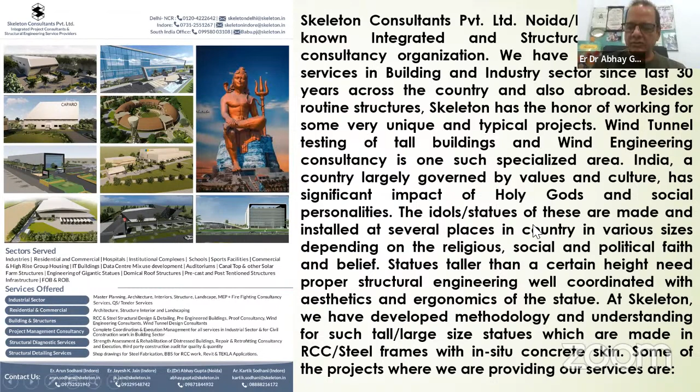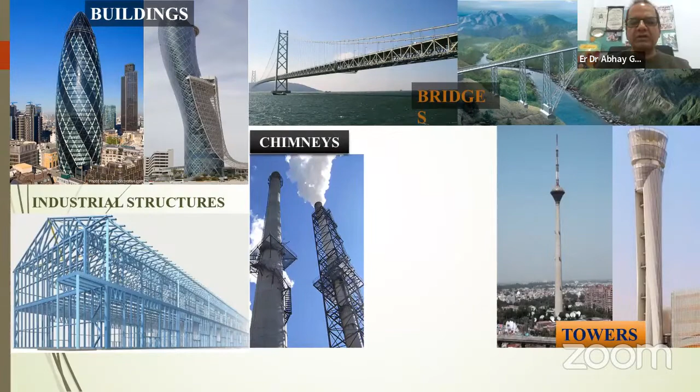So rather than that, we all have learned the design of buildings, some of the very well-known worldwide buildings I have shown. We have also learned the design of bridges, some of the marvelous bridges in the country and around the globe. Huge industrial structures, a complete space frame matrix of the steel trusses, air traffic control towers, which are very special structures. Chimneys are there, but a structure like this, a statue, which has got a height similar to building or tower, which has got a huge shape, huge size like industrial structure or chimneys, the size, and the bridges, dams. But the complication lies in the fact that when you start studying the cross sections from ground to the top, every cross section at every inch starts changing.

The prismatic shape word is far beyond from these shapes, and you have the complexity of the shape, which is a human posture or some other statue. So this is the challenge of designing a statue which encompasses the peculiarities of many of these.

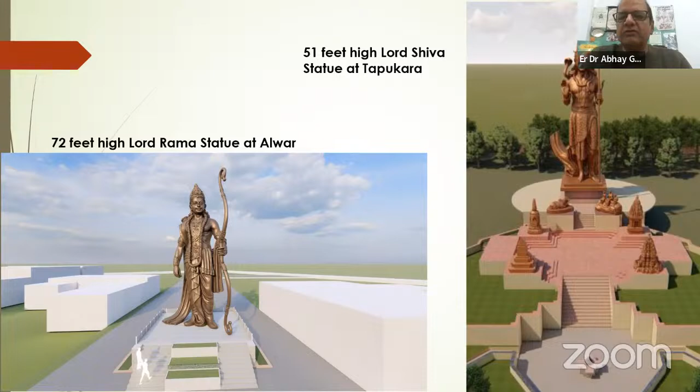Different materials are also there. Worked for a statue of Lord Rama and Shiva. Then Hanumanji at Koradi in Maharashtra near Nagpur, 151 feet, and then Lord Rama statue in Guna. These are under progress. Under the right side, Hanuman and Ramchandraji is under construction.

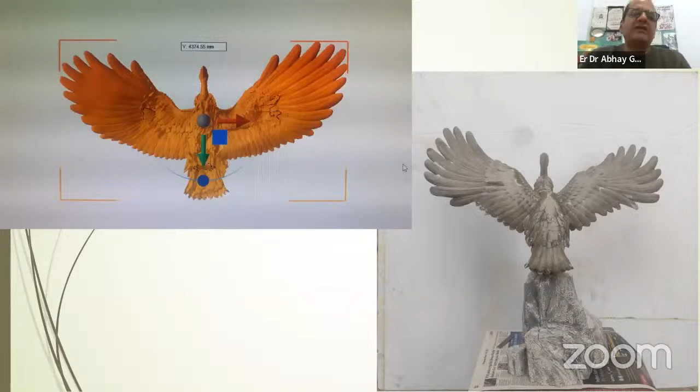This is a very typical statue work which we have just been assigned in Ayodhya. You know, Ayodhya has been revamped. Ayodhya has been restored to its original glory, and all the characters from Ramayana and that period are being placed, installed. So this is Jatayu statue, and it is not very big, but it is complex and vulnerable in terms of those broad wings which are on either side.

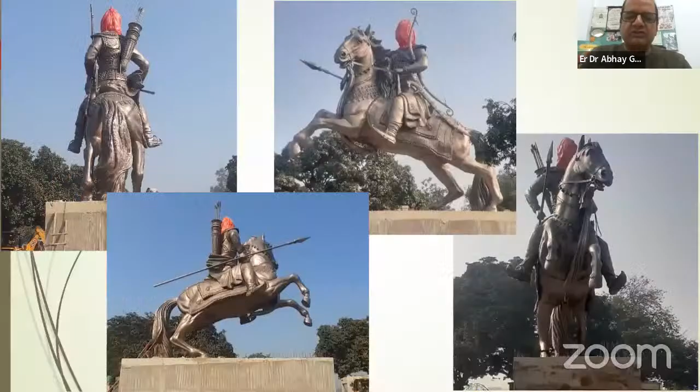On the right side is the horseman statue of Raja Suhel Dev in Bahraich, UP. This statue is very challenging as the entire weight of the horseman sitting at the top and the horse body is only resisted by elements passing through two rear legs and the tail. So the entire weight is balanced like this completely. This has been constructed, and these are the actual constructed pictures. The face is covered because it is yet to be inaugurated.

We also do statues in India. We are making statues of national pride. On the left side is the statue of Lachit Borphukan. He was a warrior in northeast Assam who did a lot of good for the country's original natives, fought against the enemies. So an 85 feet high statue is coming up in Jorhat. We are working on this.

On the right side, you see, not me in the picture, that's once I pose and click, Netaji Subhash statue at India Gate, New Delhi. We didn't do the manufacturing, the fabrication or anything else, design of this statue, but this is a solid stone statue in granite, and it is 28 feet high, 72 metric ton weight. We did the design checking from the perspective of earthquake when this was to be installed, and we did the complete erection engineering right from shifting this statue from its crafting place, which was in National Gallery of Modern Art, Delhi, from there to bringing it here and then establishing inside this existing canopy. It was a challenging task, and we did the design of the entire steel structure, and then it was placed here.

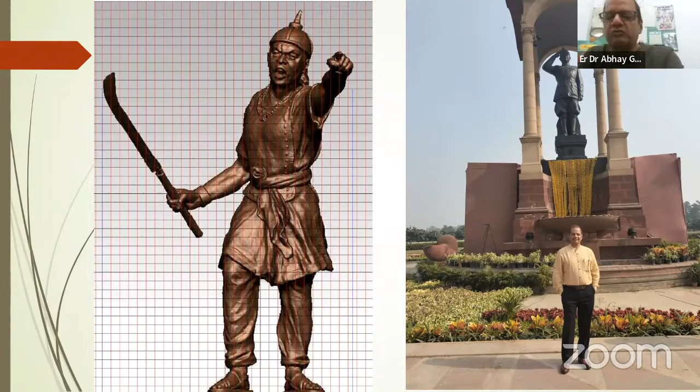Worldwide, statues are made for various reasons and of various materials. Primarily, the internal frame is one material and external skin is another in case of hollow statues. In case of solid stone statues, that is all stone. So this one statue is say 29 meters with a pedestal of 11.5, so total 40 meter granite stone solid.

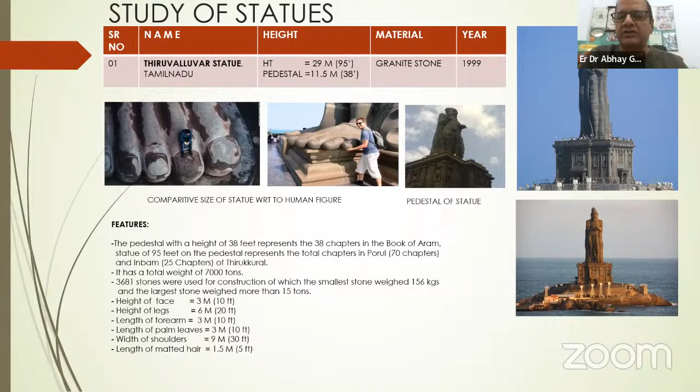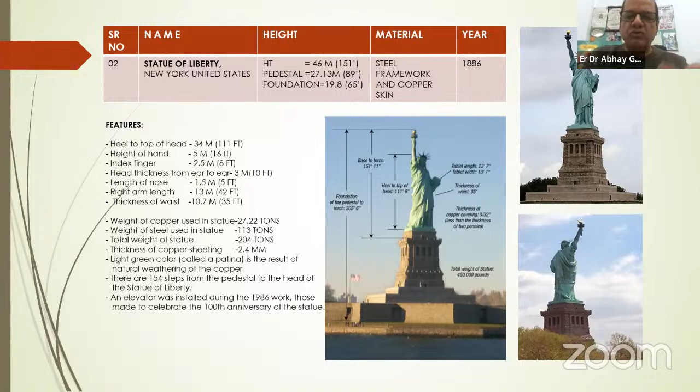Statue of Liberty, we all have seen this. This is similar to what we did in Nathdwara and what has been done in Sardar Patel statue. It's hollow inside, steel frame, and over that a skin has been put. In case of Sardar Patel statue, steel frame is there and the statue skin is casted cladding of bronze, which was done outside India and then brought here and fixed over the frame.

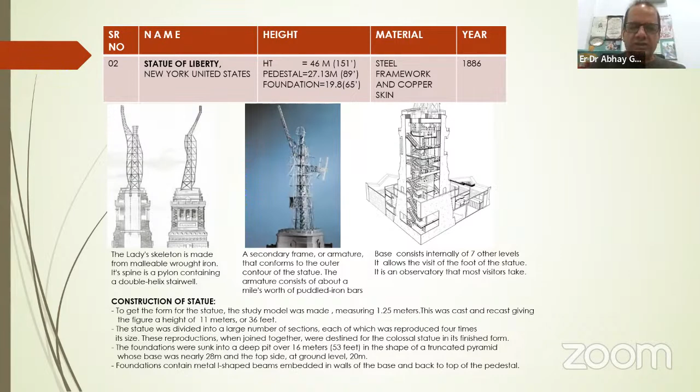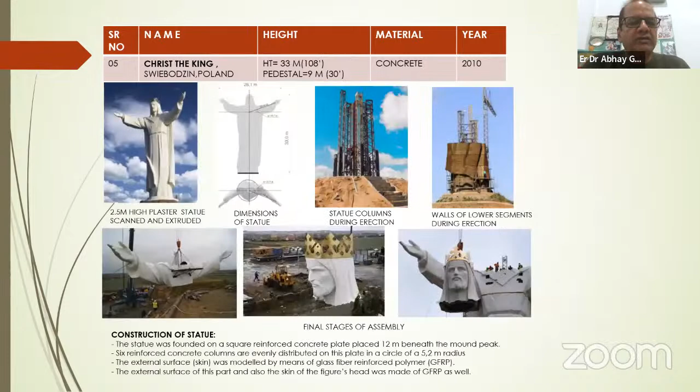Whereas in case of Lord Shiva statue and even in case of Solan Hanumanji statue, the skin is a cast in situ concrete skin, which is a big challenge. I'll share details of that. Jesus Christ statue is steel and concrete. Cristo de la Concordia, this is again Christ, but this is steel and concrete, and this other one is concrete only. This is another statue which is steel frame and concrete. You can see worldwide height-wise different statues are constructed, and here it is 182 meters Sardar Patel statue.

This is a monument in itself, lasting for a longer time period. This is steel framing. Concrete is on some core wall and then casted metal skin, bronze skin on that.

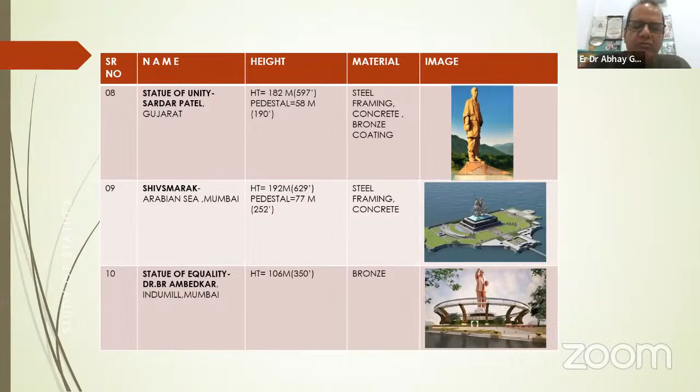Then second one is Shivaji statue, which is yet to be done, in Mumbai. Quite tall, they have proposed 192 meter. And statue of equality, Dr. B.R. Ambedkar in Mumbai again, that is again on the proposal stage concept. We are not doing it, I'm just showing you different kinds of statues. Lord Murugan statue in Malaysia is very famous. Then Ukraine, and then Gandhiji statue in Bihar, Patna.

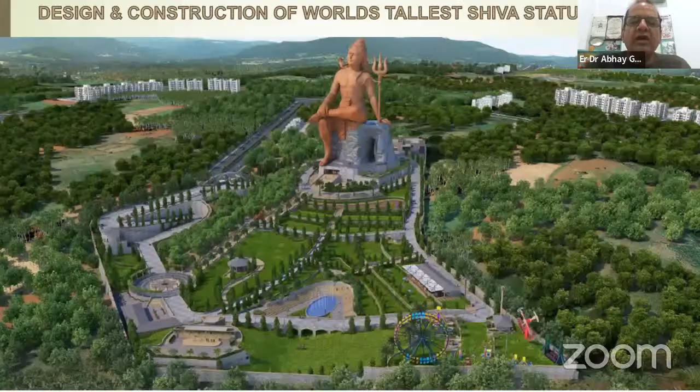There are some more statues of Lord Shiva in sitting posture coming up at various places, 125 feet. This is the statue which we are going to see in detail, a bird's eye view of the entire project before the construction was done. And this is after construction, a picture taken from a long distance. This is visible from almost 20 kilometers, people say.

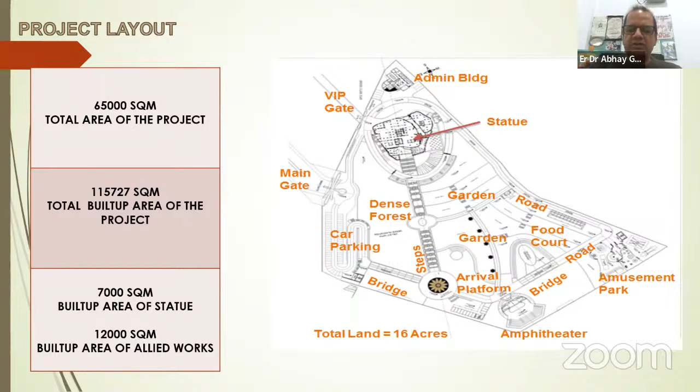The site is a 16-acre land where besides the statue, many developments have taken place. The statue has been recently inaugurated on 29th of October by Shri Morari Bapuji, and it's a complete entertainment theme park. So whenever any of you comes to Udaipur, you must visit this place. This is all set for visitors.

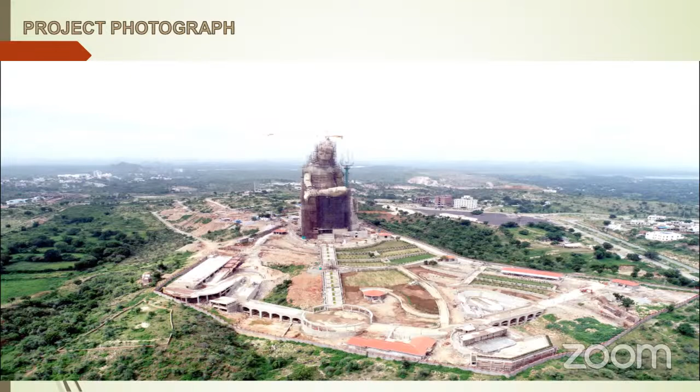You can enter, go inside, and go up to the top, up to 280 feet. There is a gallery where you can come out, and then you can even go up and do Abhishek at the top. So that is all the fantasies and attractions created besides other things.

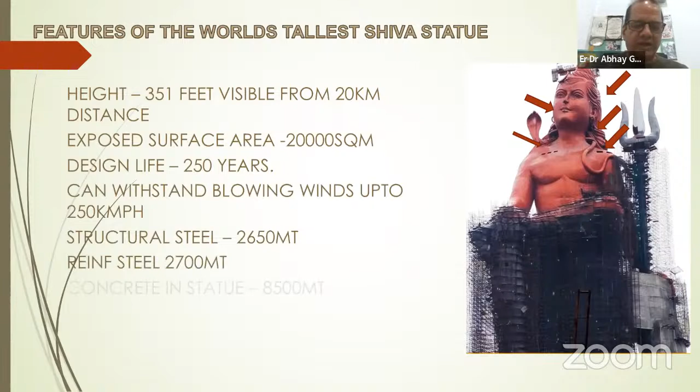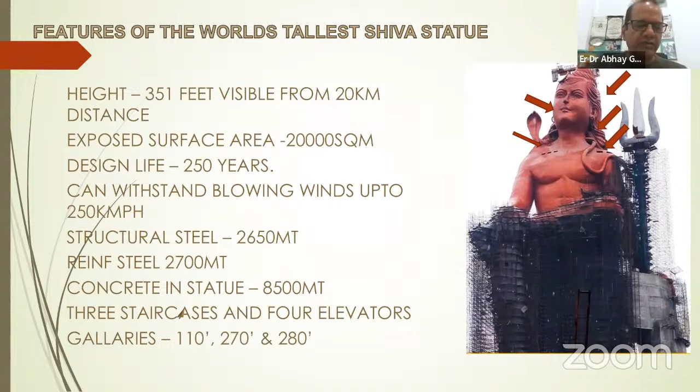Some of the features of this statue: the skin which you see is 20,000 square meter, which is almost 2 lakh square feet. The statue has been designed for 250 years of life. It can sustain winds up to 250 km per hour. Total steel consumed is 2650 metric ton, reinforcement 2700, and concrete in the statue is 8500 metric ton. There are galleries at different levels, I'll share the details.

This is the team which has worked. The main person, the brain behind this statue and the sponsor, is Mr. Madan Paliwal from Miraj Group, Nathdwara. The Murtikar sculptor who did this posture and the complete shape, the Murtikala, is Naresh Kumawat. We did the structural design where Professor Prem Krishna, many of you must be aware of his name, former professor and head of IIT Roorkee Civil Department, did the proof checking. Shapoorji Pallonji did the construction. Excellent work done by Shapoorji, and I have full appreciation for them for this wonderful work.

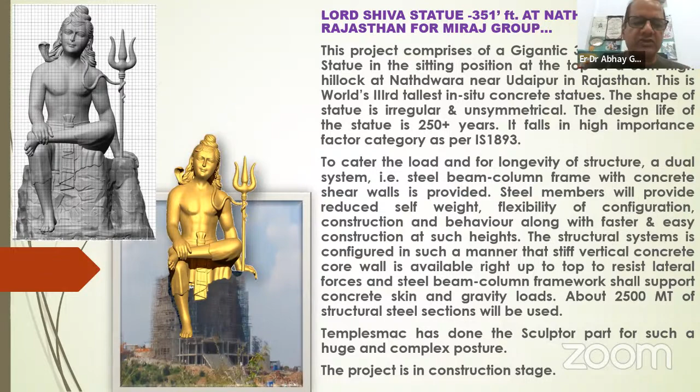How is this done? The project comprises of one 351 feet statue with a 170 feet trident. You can see the Trishul by the side, which is 170 feet freestanding.

It is varying, unsymmetrical, and in all three directions, more than three directions even. So we employed a software called Tekla, which has enormous and very good 3D capabilities in building information modeling. Wonderful job was done by the team. We extracted shop drawings from Tekla, and the fabrication work done by Shapoorji at site was amazing. There was absolutely no flaw anywhere, and all parts were assembled one by one at site. This is how the shape has taken place.

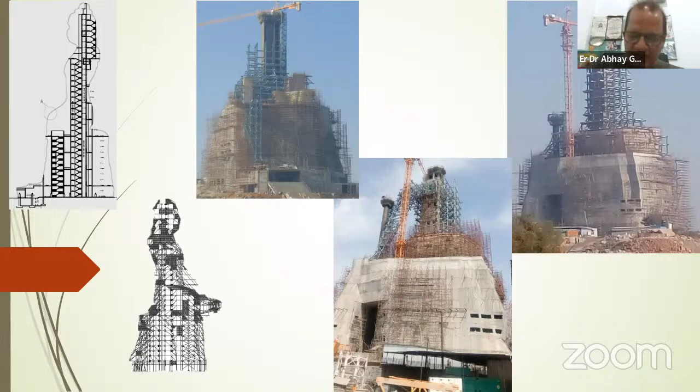When it comes to a statue like Hanumanji, which is standing, there's simplicity, but there's complexity in a sitting posture statue.

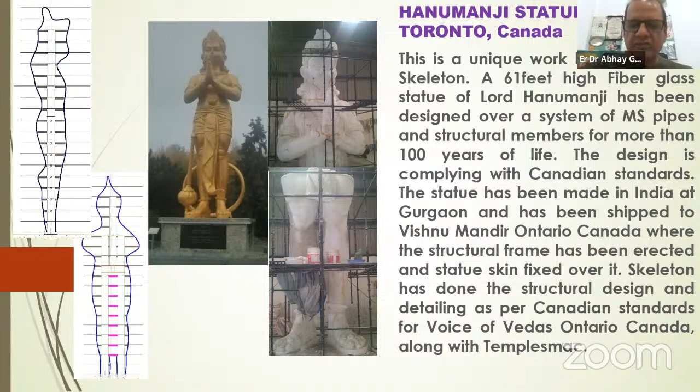But when it's a statue like the sitting posture of the Shiva statue, the variabilities are too many. The structural columns, main structural members, you cannot continue all columns - you have to see which are going to be terminated, which re-erected as stub columns or bracketed frames. I'll show you those things. That is the difference between different types of statues, and our challenge lies in the structural planning.

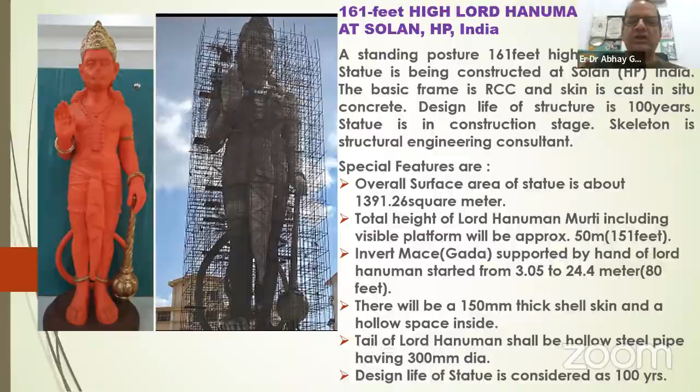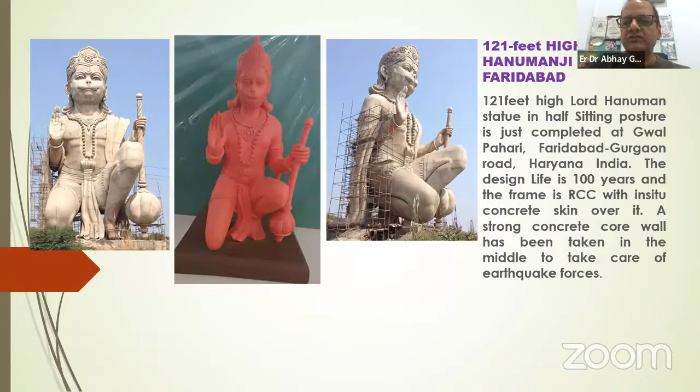This particular statue, as I was saying, is in the Limca Book of Records. That is the actual photograph of this site - this is Faridabad. In all of these, the complexity lies in identifying the plan layout at various levels.

So for this, the sculptor or Murtikar, once the posture is approved by the client or sponsor, uses new technologies - 3D scanning and digitization - to get cross sections at any desired level. We ask them to provide cross sections at closer spacing. In case of Lord Shiva, we got cross sections at every 5 feet of height.

But in case of the Jatayu bird, we got cross sections at every 0.25 meter, because it's a smaller statue with more complexities and variabilities.

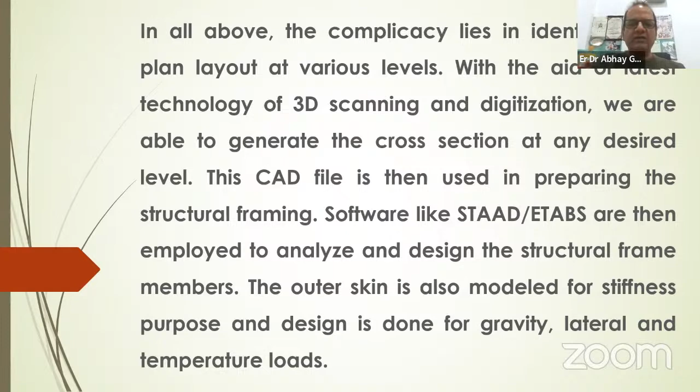Once we decide the material of the internal frame and the external skin - like steel frame and concrete skin - we could have had steel frame and glass fiber skin, steel frame and metal skin, concrete frame and concrete skin, or concrete frame and glass fiber skin. All these are possible.

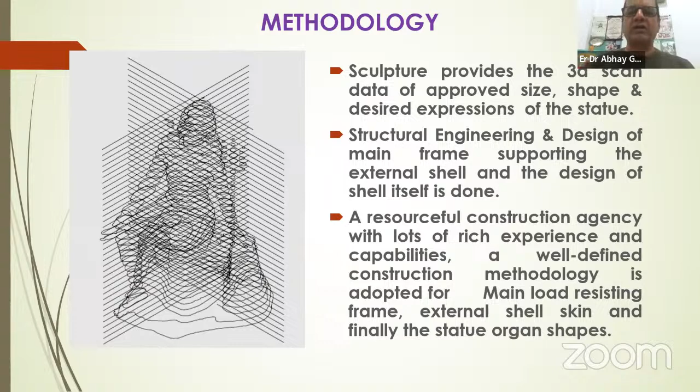So then we do the scanning of a sufficiently enlarged mock-up model. We cannot have a 1:1 scale - I'll show you that. So we start with a small 8 inch model. Maybe the client got this from somewhere, liked this posture of Lord Shiva, and gave it to the Murtikar saying 'I want this.' Then the Murtikar developed this.

Then both of them review it, and it goes from 8 inches to 7 feet - the 8 inch model is 3D scanned in the CNC machine, and then a thermocol mold is made, cut with the CNC machine from the enlargement. Then this posture is again reviewed to see if any changes need to be made.

Once done, then a 14 feet version is made. Generally we go up to 1:24 scale. So when I'm saying 351 feet high, a 14 feet model will be sufficiently good to correlate from this size to 351.

So after 3D scanning and digitization, in order to properly enlarge the small idol to a gigantic statue, at every stage there's 3D scanning, enlargement to the next level size, mold making, dummy casting using plaster of Paris or metal, or ABS using 3D printing. Nowadays 3D printing is available, so that digitized data is fed into the 3D printing machine, reviewing the next level size, making corrections as per looks, aesthetics, and expressions by the sculptor.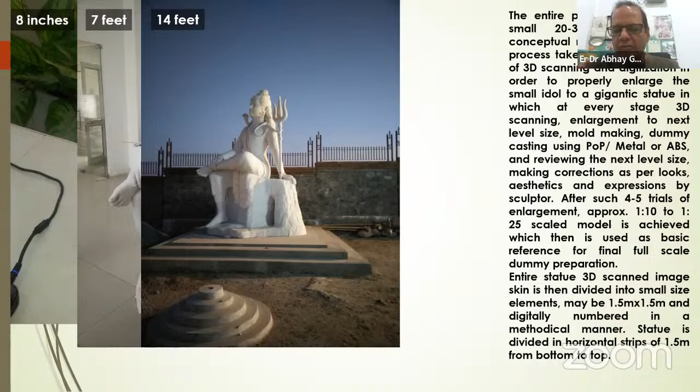So proportionate enlargement of those components which are going to be away has to be little more. So the scale of enlargement has to be different in the lower part of the statue and in the upper part of the statue. That is where the skill of Murtikar is needed. So our sculptor did a good job by properly proportionating this thing.

So this was the final, and this is the scan data of that, which was then fed into a machine and given to us before that for structural designing. So these are the structural sections at different levels. I am just presenting to you 3, but there are 70 such sections. If you look at the leftmost, this is almost the lower part, quite a lower level, where you can see this must be 110 feet.

So here you can see 1, 2, 3 RCC shear walls, which are used for the lateral strength, lateral stiffness of the entire statue. And then when we superimpose this over a 160 feet level, then we see that some of the elements cannot be continued because they are beyond the skin. So there we have to terminate them and see how those elements can be supported.

Then further when we go up, the other one on the right hand side is 280 feet. Here you can see the lift shaft, which was here on the back side in the 110 and 160 feet. It is just coming in the middle. If you look at the body posture, it is backbone. Basically, this is backbone. So the backbone comes up to the neck level and neck to the head level. So that automatically will come in the center as you move ahead from the waist level.

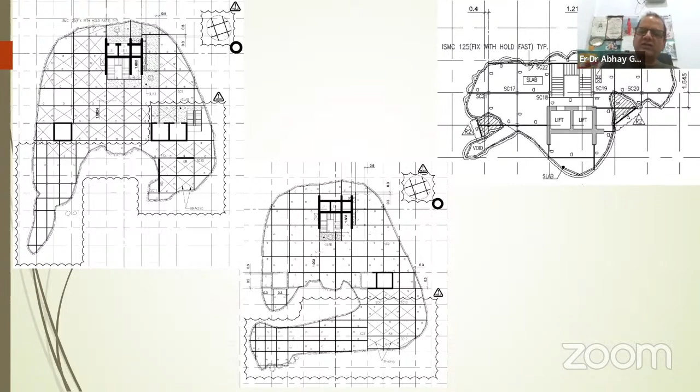So here that is the challenge, that which element will go up and where I have to start new elements, because the hand is projecting, some part of the body are projecting, which cannot be connected from the bottom. So this is the exercise which needs a lot of skill and structural engineering understanding. In case of Lord Hanumanji, this is simpler because the 2 main columns are going right up to the top, from where we are just taking out the cantilever framing up to the skin at every level. That is comparatively easier as compared to this.

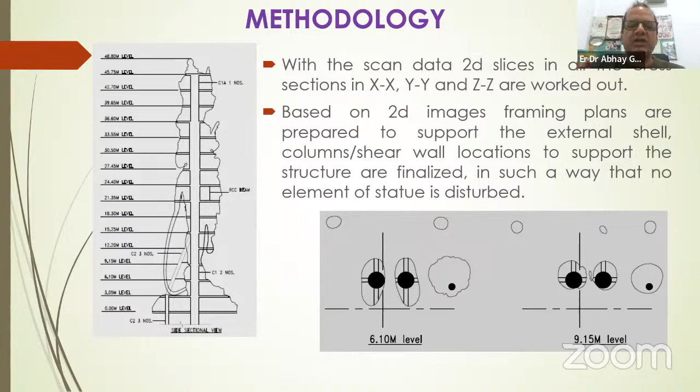Once done, we try to understand the challenges. It is a non-symmetric structure. There are irregularities. Structural steel frame is there and shear walls considered. So the entire steel frame is connected to the shear wall. So it's a hybrid system. And it has been checked safe for wind speed up to 250.

Now, what wind speed is to be considered? See, the IS code does not provide any kind of design wind speed for such structures. It is for usual buildings. They say for any such type of thing, you should go to the wind tunnel. And we did that. We prepared a model on 1:200 scale and then took it to Australia, Sydney, Windtech. Windtech is a wonderful facility there. There we got the wind tunnel testing done.

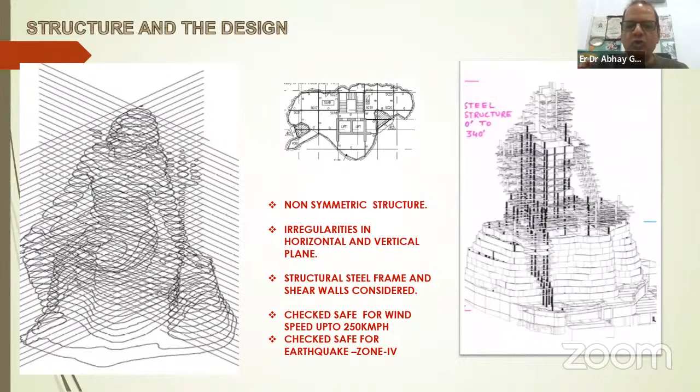And before that, we collected the data from 3 meteorological stations around Nathdwara, 3 airports, and then collated them to get how much is the local wind speed in that area. Similarly, for earthquake, though Nathdwara falls in earthquake zone 2 as per the IS code, but for a structure which is going to be designed for 250 years, we never know what is going to be the change in the geology of the area.

Though we did several studies, the geological study was done, the geotechnical exploration was done, and wind tunnel testing has been done. So rather than taking any chance, since there are 3 lineaments around Nathdwara, which are not active, but maybe in future some activity happens, we have considered a peak ground acceleration of 0.36, PGA 0.36, and with an importance factor of 2, that becomes 0.72 PGA.

So that high value of the, and then further response reduction factor, etc. Though we didn't use the response reduction factor more than 3 here. So some of the special features.

One special feature of the entire skin, which I said is 20,000 square meters, is there is no joint in the entire skin. Complete casting on site. I'll share how the casting was done. But that entire casting is a continuous casting with green cutting. Many of you must be aware of this term green cutting. We didn't leave any joint in the skin, using green cutting.

And another important thing, using minimum 45 days of water curing, we could achieve a complete 2 lakh square feet of the skin that after 4 years of construction today is flawless. Nathdwara has a temperature variation of 50 degrees Celsius in the day to almost 0 at night. Since the concrete thickness of the skin is 200 to 400 millimeter, the temperature differential from outside to inside was almost 20 degrees.

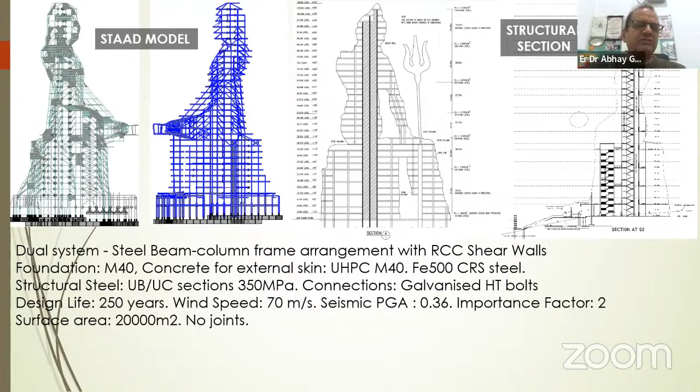If the temperature outside was say 40-45, inside the statue the temperature is much less. So that thermal gradient study has also been done on the skin. All those things we have done. This is the other statue, I am comparing side by side. You can see it is very straightforward as compared to this one, the software and models. You can see the complex structural framing, whereas here it is quite simple. This is Hanumanji.

This is the wind tunnel testing. We have considered various loads in the design, self-weight of the entire structure, skin and all that. Self-weight of skin is quite significant. So the entire analysis has been done in 2 conditions, with skin and without skin. When the skin is there, wind pressure will be there because it is obstructed. When the skin is there, mass will be there, so earthquake force will be there.

But when the skin is not there, there will be less wind, less earthquake, but there will be much less stiffness of the entire frame. Correct? And we did the analysis with and without skin, and we observed that adding the skin in the model increased the rigidity by 8 times. So that was a very significant change, which was required also with the skin on.

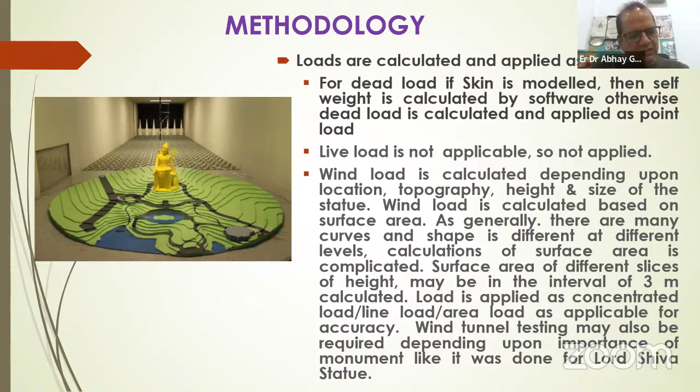The photograph on the left side is the Sydney wind tunnel, where we placed the model on the terrain also. The actual geography, actual contouring of the entire area was picked up by the wind tunnel agency themselves, and they did this modeling and testing.

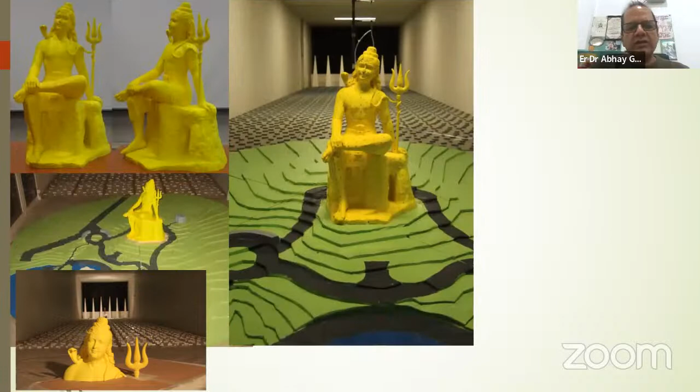So you can imagine 726 tubes, 1000 samples per second, data collected from each tubing for not less than 32 seconds. So 32,000 numbers of data into 726, that was one set of readings. And similar from all 360-degree directions at every 10 degrees, means 36 sets we did.

And then we did another study, that in say the next 250 years, there will be some development coming up around. So we also did one study from the most critical direction by placing some hypothetical building blocks, if some buildings come up in that direction, what will happen? All that was very meticulously done by Wintech, and we went there, stayed there for 3 days, studied, discussed with them, and got very good results. Very wonderful professionals.

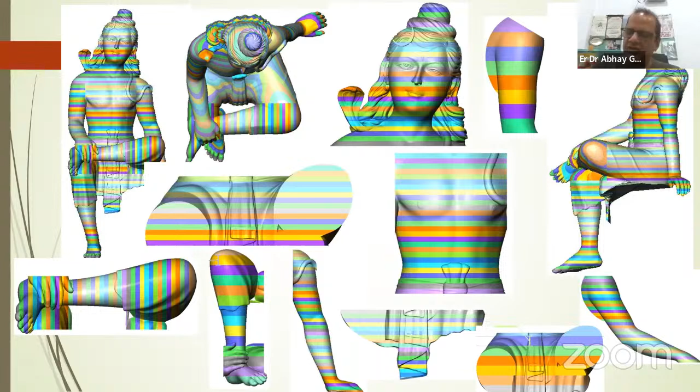This is how the casting was prepared. So the entire statue was identified in slices. These colors are each of 5 feet height. So the 5 feet slices were identified, and then each slice was fed into the CNC machine, where high density thermocol of this shape was cut using a 6 degree of freedom robotic arm CNC machine. And those were then assembled in the field.

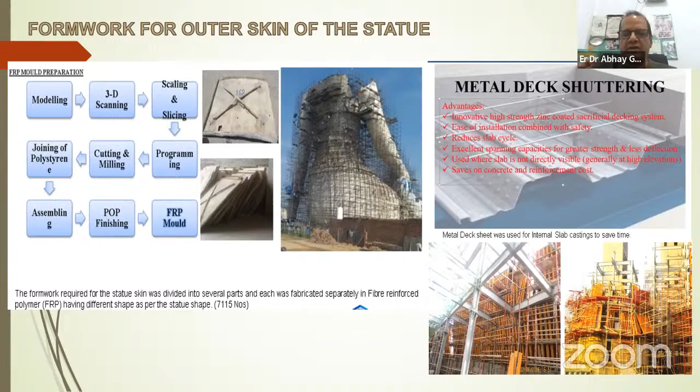I'll show you like this. The middle one is a dummy, a full scale dummy made using those thermocol cut pieces to extract the glass fiber molds. So on the entire skin, the glass fiber was laid, and roughly 5 feet high pieces of glass fiber, properly stiffened from the back, were manufactured, stacked, and then shifted to Nathdwara for external skin shape casting. So this is the full scale dummy. You can see these are some of the construction stage pictures.

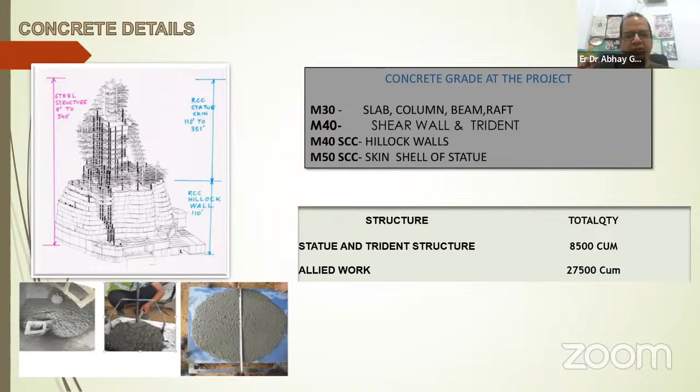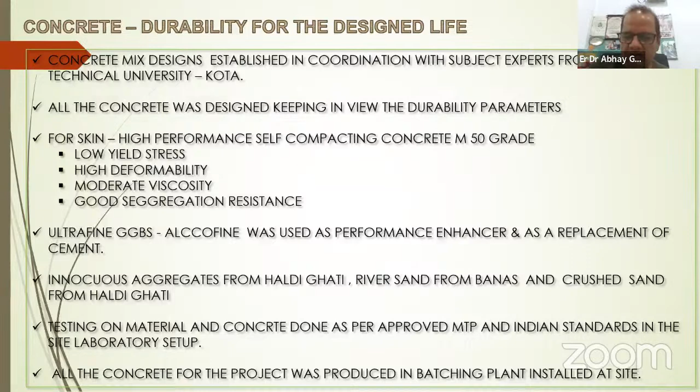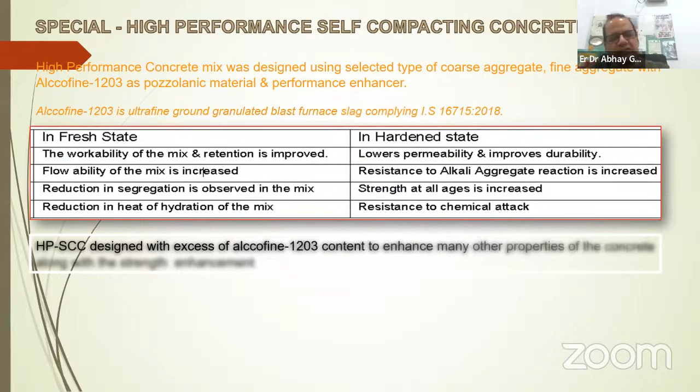Concrete which was used: 8,500 cubic meters for the statue and trident, and other allied works 27,500 cubic meters. So a huge quantity of concrete, M40 mainly. A high performance concrete mix was designed by Engineering College Kota using ground granulated blast furnace slag and Alccofine, using shrinkage compensating agents so that shrinkage cracks are not there, and tests were done for the longevity. The salt water spray and all those tests were done on this concrete to ensure that it lasts for 250 years. So various tests on the concrete were done. Concrete technology of this project was a big challenge and was successfully done.

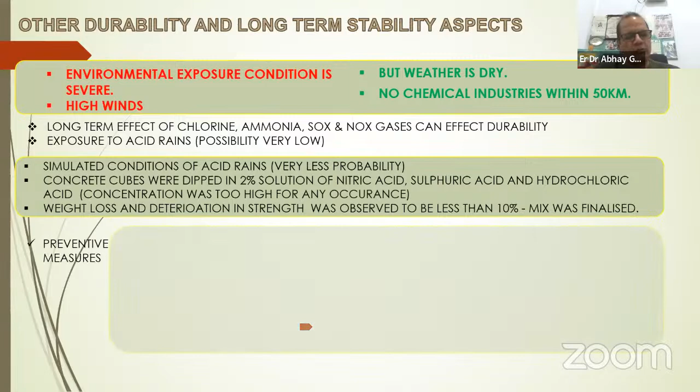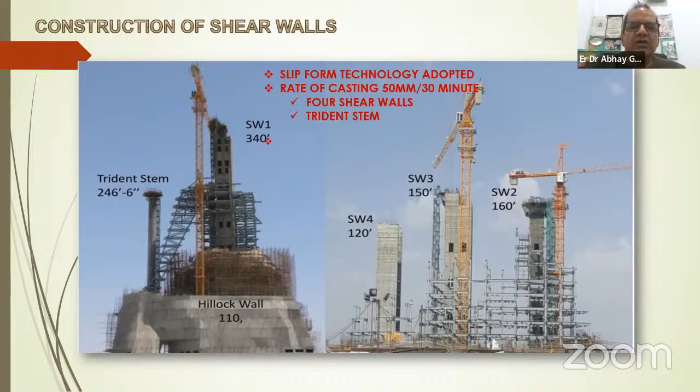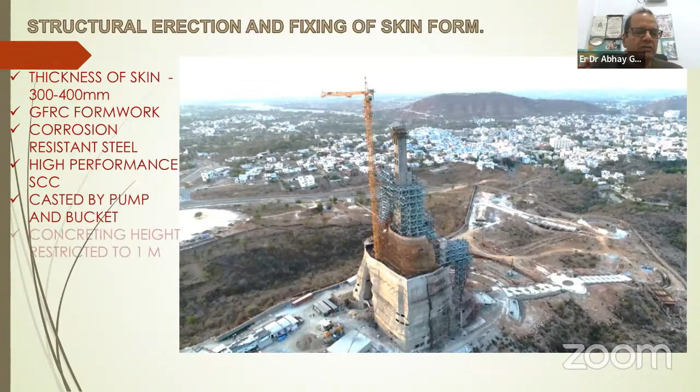You can see the Trishul now being installed, the trident. The challenge was that the trident base part is a circular RCC column, and the trident part is metal, which was weighing 55 metric tons. Now, if the 55 metric ton trident is made on the ground, no helicopter or machine in India can lift it and place it there. So it was fabricated on ground in parts and then shifted to the top and then connected there.

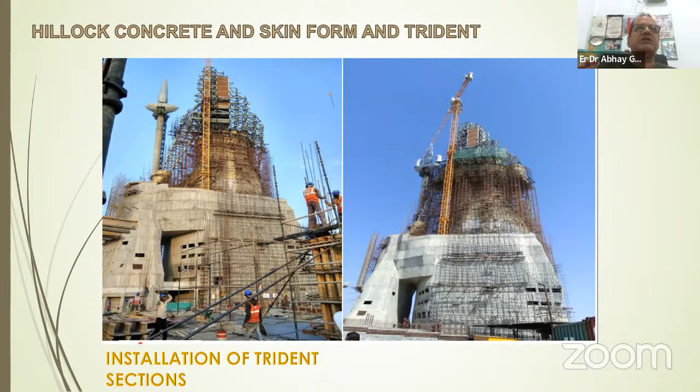Welding was done there, which was another challenge, to do welding amidst this strong breeze. So a cordon of curtains was fixed around the trident at that height so that the wind does not adversely affect the welding quality. And Nandi is also there on the side.

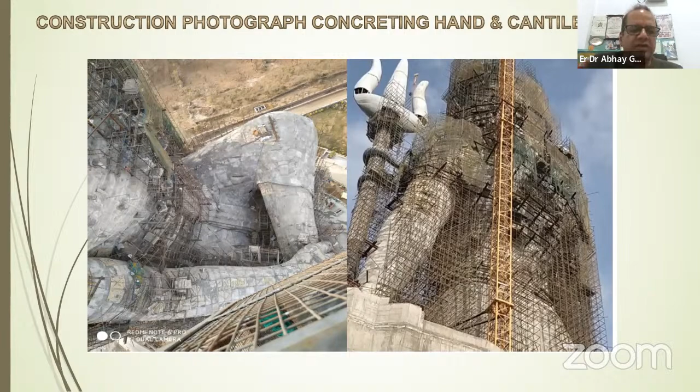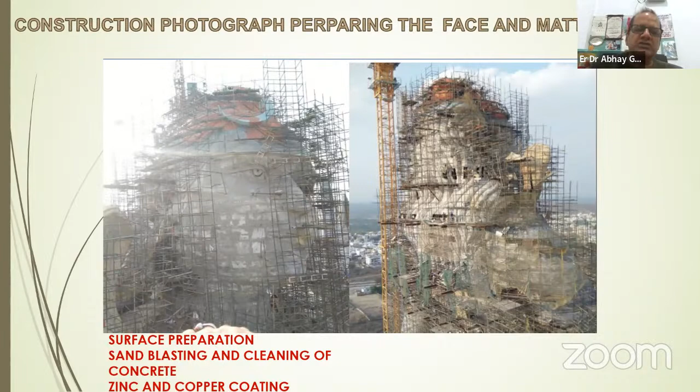Some of the construction stage pictures: you can see once the concrete formed and the shuttering was removed, the shuttering marks are there. So then shot blasting was done using sand to make the skin completely uniform. There is no other external rendering done, only that shot blasting, sand blasting, and then zinc and copper coating has been done. Zinc phosphate primer, and over that 50 micron copper metallizing has been done.

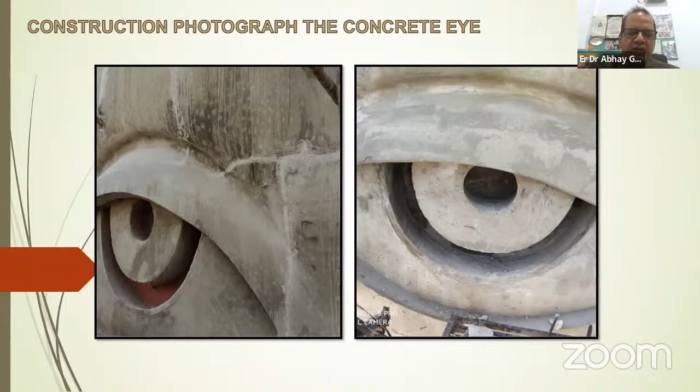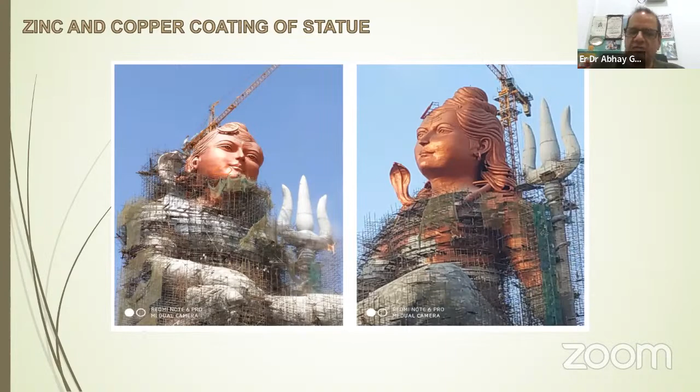You can see this shape of the eye. Everything has been cast as it is. Nothing has been separately pasted or rendered. All of Shivji's hair, the curves there, the grooves and everything you see is actually cast like this. There is a crescent moon and the snake on the right shoulder. These are all metal pieces which are fabricated and then fixed here. This is a time-lapse photography. You can just enjoy for a moment.

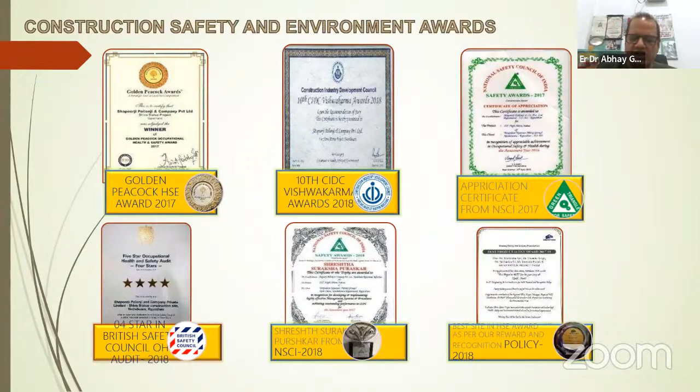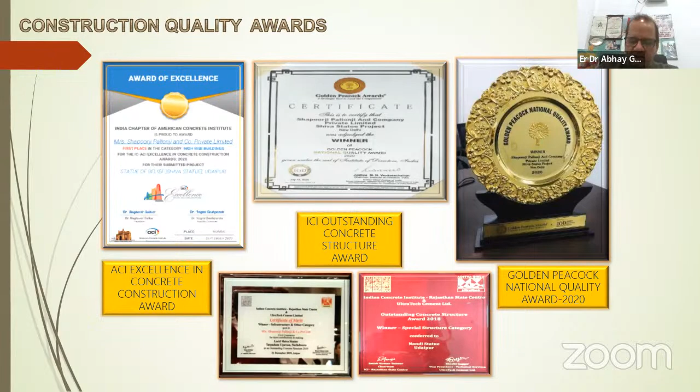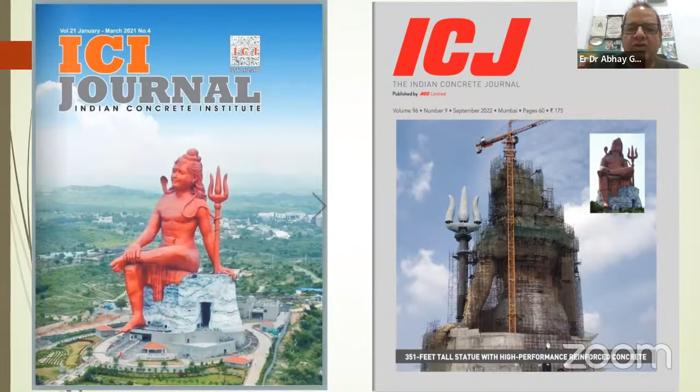I visited after finishing. Almost all the awards of the construction and design industry have been conferred on this special project. Some of them are here and some of them are for Shapoorji's excellent work. Some are for the design: ICI Outstanding Concrete Structure, ICI Innovative Concrete Award, ACC Simplex Biennial Structural Design Award, and a very proud one is this: two well-known magazines have covered it on the cover page. So nothing can be more than this.

The American Concrete Institute, in the worldwide high-rise building category, has chosen this for first place in the global competition, Excellence in Concrete Construction. This award was given in 2020. This was supposed to happen in Boston physically, but due to COVID in 2020 this could not happen, and I made a presentation online. And then last year in Mumbai, they physically presented us the award. This one was given there.

So in the worldwide standing, there's 182 meter Sardar Patelji, and we are at fourth. Actually, 351 is the sitting posture, but if a person is 5.5 feet standing, then sitting he will be looking like 3.5 feet. So actually, all the organs, all the components, the shape and size are like a 550 feet high person, but sitting it is 351. Inaugurated recently by Morari Bapu, and here with the team, the day when we did the last casting, I am standing right at the 351 feet level on the top of the head of the statue.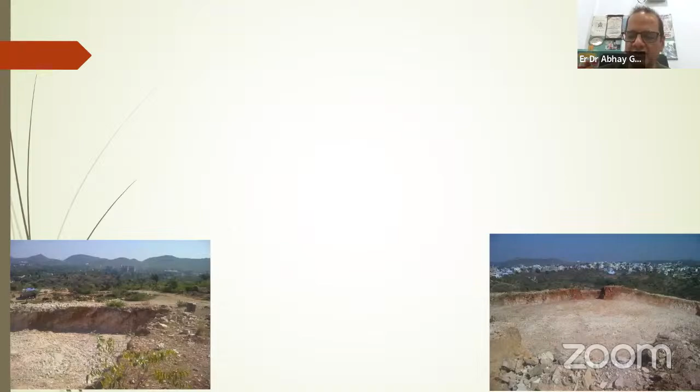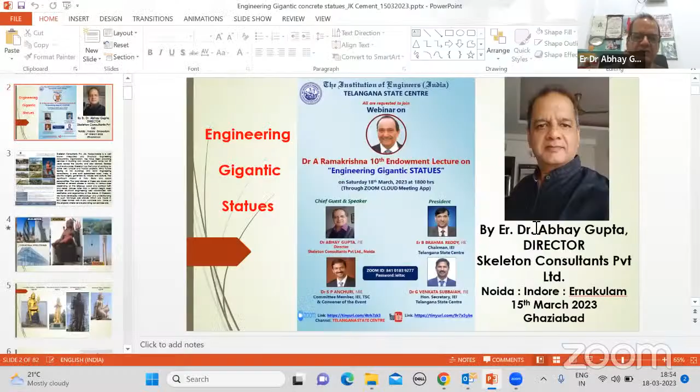So thank you very much. And I'll just show you that from here, the site, to this place, we have come up successfully in a span of 10 years, out of which 4 years work was not happening. So the actual construction time was 6 years, but a monument has been created. Friends, I'll just share with you a small video of 3.5 minutes, which we have made especially for this project. So I hope you will enjoy that.

I hope you are getting the sound. Yes, sir. We are getting it.